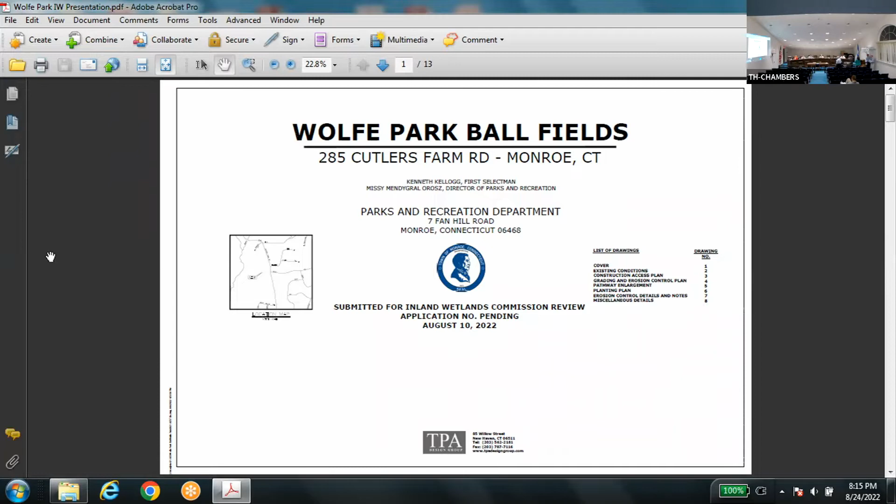We were asked to review and see what we could do to bring the project down in scope and complexity, and make it possible to get this carried out.

This graphic shows conceptually what we're looking at doing. The two fields: one is proposed to be built immediately east of the existing tennis courts in an open lawn area. The second, the west field, the larger of the two, is proposed to be built further west of the tennis courts across an existing wetland corridor. The project will also include construction of a walking path out to the west field to allow for pedestrian and emergency access.

The significant difference in this application is that we've reduced the size of both fields. The original scope back in 2017 was to maximize use, particularly of the west field, making as large an available playing area as possible for staff flexibility, and so the field location could be marked out differently year to year, enhancing the longevity of the playing surface. What we're looking at now is cutting back the size of the graded area in order to reduce the earthwork volume and bring the project down a bit in scope.

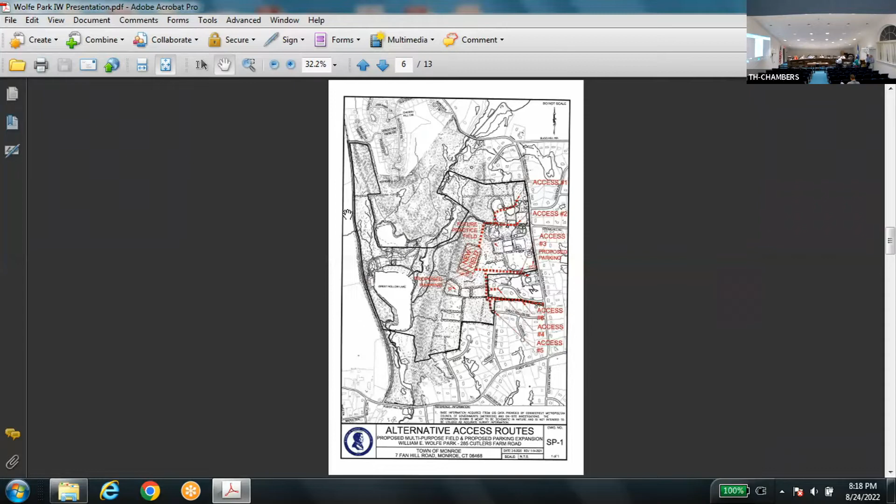But to get back to the other impacts, those are upland review area impacts, not direct wetland impacts.

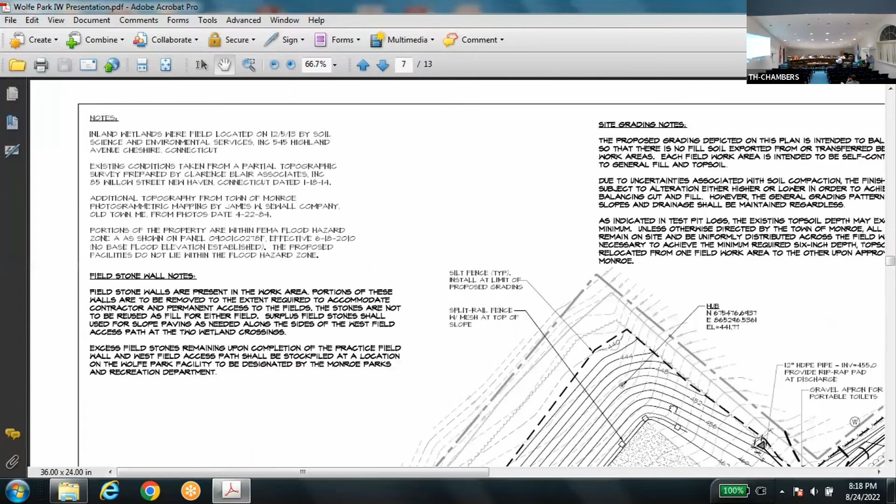What we're proposing to do now—looking at this, the practice field area is now the practice field. We are retaining the stone walls to the south, west, and north. The field previously had expanded much farther north and south, so it was necessary to remove those walls, involving grading and wall restoration. What we're trying to do is diminish the impact area and the potential cost by keeping the design as simple as possible.

We've also changed from a design which had a crowned ball field to a cross slope, so the field will slope from the tennis courts west toward the wetland.

Because we previously had a crown, we were anticipating needing drainage work between the field and the tennis court, since water would shed off the tennis court into a low area and also shed off the crown of the field to the same place. We had proposed an under drain at that time. At this point, we don't think that's necessary in terms of cost. However, we'd like to preserve the possibility that if a contractor working out there discovers a shallow groundwater issue, we may go ahead and install a French drain—a stone-filled trench—to allow water running off the tennis court to infiltrate more efficiently with less impact on the field.

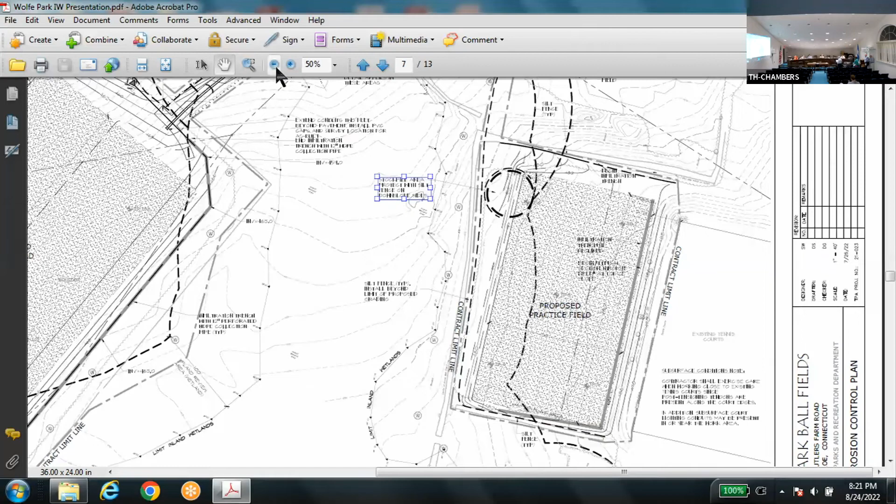That's essentially the crux of what we're proposing. The economy has been gained by simply taking out work - not having to relocate the stone walls, reducing the area that we're trying to create, so we're doing less earthwork. And we're also not making a paved path. It's going to be a gravel path. Instead, we're trying to see this through as efficiently as possible.

Overall, both fields have been designed to balance cut and fill. This is not intended to be an earthwork project in the sense that somebody's trucking in lots of material. In terms of what comes in, it's the material associated with building the pathway - the base material, the surface material, the pipes - and for the fields, crushed stone and pipe for the underdrains. The intent is there's a lot of good topsoil out there. It gets pulled aside, stockpiled, and reused once the fields are graded.

The fields are graded so that in both cases, you're cutting on the east side and filling on the west side. So we're taking what's right now a fairly steep sloping field and turning it into something that's at a playable cross slope in the order of 2%. So that's the crux of what we're here for - to get your consent that this remains consistent with the original approval and allow the parks and rec to move forward with the process.

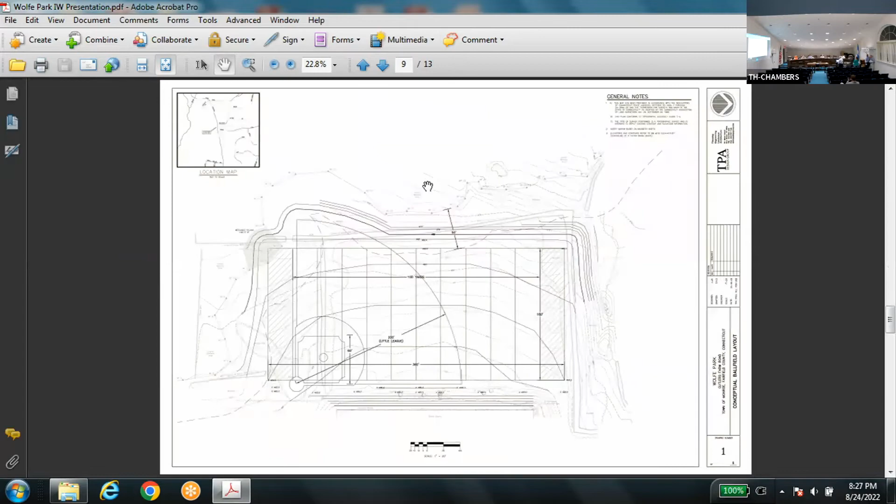Could I ask, can we go back to that first image that showed the pathway through the wetlands? Okay, so I've been a longtime resident and I know the area well, and I actually thought that going through that space would perhaps be more invasive, but in terms of the wetlands, it does not look like it is.

I'm curious about a lot of things, though, just as a parent of children in town. What is the relationship between those two fields? What is going to be happening? One is drawn to look like a soccer field and the other like a football field, but one is called a practice field and the other is west field. What is the intent of those two fields in relation to one another?

Ms. Orosz, the Parks and Recreation Director: So the intent of these two fields—all of you are aware we have a dual purpose area of baseball, softball, and soccer/lacrosse. So the goal to get these fields finally done is for soccer, lacrosse, football, field hockey, so that the baseball and softball fields can now be used accordingly. It's just a shift of some of the activities we're planning to do there.

Is that, so it wouldn't necessarily be that a youth sport would be on the practice field and then go over and play their game on the other? So one of the things we were talking about two years ago—I met with league presidents when I first really got into the reboot of this.

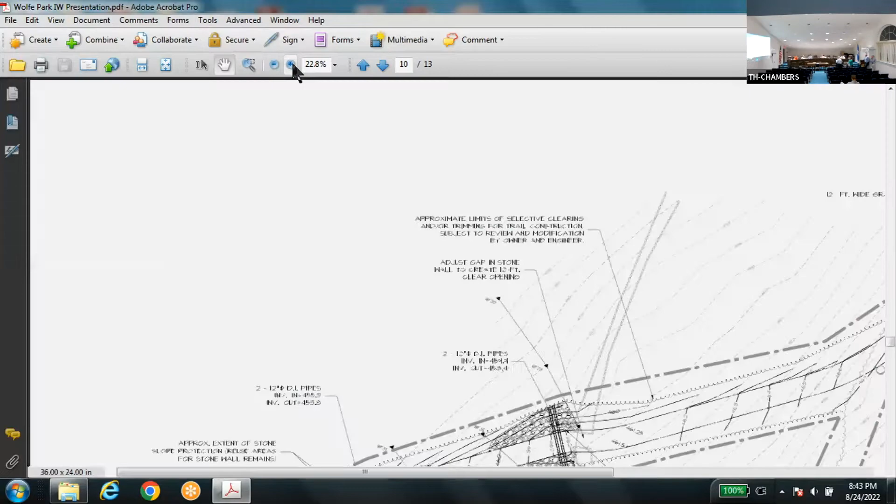How many square feet total impact? If you go to your plan, page 5, it actually shows it pretty clearly. Total direct wetland impact area is 2,971 feet. That shows those two crossing points pretty well.

Yes, and as you can see, we have the 2-to-1 grading — particularly the upper one is flattened out a little bit in order to accomplish a softer grade, especially on the downhill side, since the entire area does slope from south to north. So there's a little bit more impact area right here and right here than had been included in the original plan. Again, that reflects comments from the town engineer.

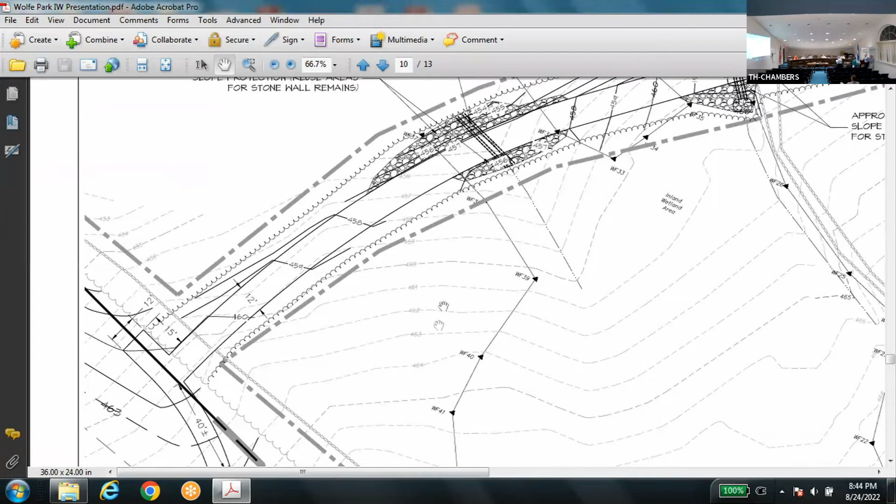For the most part, looking at other parts of the trail, we're trying to keep the grades as smooth as possible and as close as possible to existing grades, just softening them so it's a reasonable walking path — not too up and down. It still feels like a trail through the woods.

Twelve feet to me, and then you've got these wider areas up to 20 — you would just say 20. I mean, it just seems so invasive and so expensive. I'd really like to see a couple more ideas. I mean, I put 4 kids through school in this town, 3 of them played soccer, we spent a lot of time at these fields.

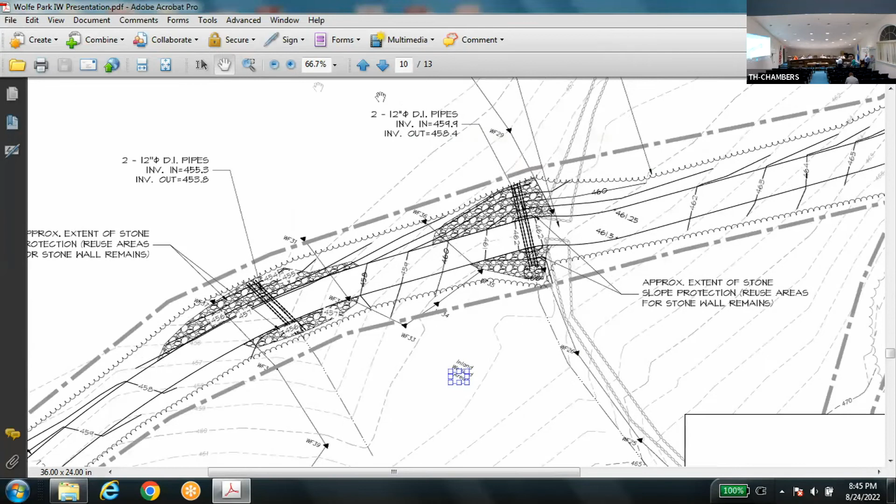Every time we wanted to go out to that hay field, we went through the lower area. There's already 2 openings — 3 or 4 stone wall natural openings that people already use. Well, this location was specifically selected because there is an opening in the existing stone wall. We were trying to take advantage of it to get through from the area where the reconstructed playscape is, through the existing path, and out to the west field.

That just seems like such overkill. And the area you're talking about is rocky, boulders, trees — it's a massive undertaking to put a path like this through here. I would really love to see another one or two ideas for where a path could possibly go.

Maybe further up out of the wetlands. I believe those wetlands extend, don't they? They're just not shown on here. Let me just back up. It looks like the end right there.

Where's the blue one? No, the wetlands weren't flagged farther down. It drops off very steeply there. And the water courses continue, they become more defined as water courses. But if we were to have someone go out and flag it, the wetlands would continue.

Yeah, and the wetlands are virtually continuous all the way along between the two field areas. There's really not a dry place that we can do this. We really identified specifically the two narrowest crossings to keep the impact as minimal as possible. We did look extensively at this shortest distance. In terms of the length of the crossing, it's almost twice as much, and there is literally standing water there much of the year.

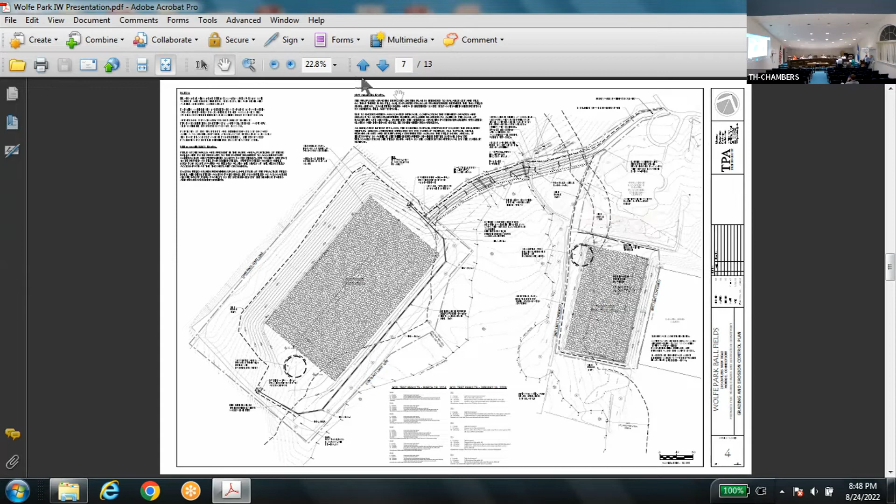So how much has to happen for the pathway as you have it designed? You call it access path 2, right? Is that what you're referring to? Oh no, that's the one that's to the practice field.

Either way, you're disturbing wetlands. The simplest way to go is the simplest path. In 12 feet, in some areas you're 24. I really like to see another plan.

Well, I might have been here back when this was approved. I don't know what I was thinking, but I don't like it. This is an amendment to an approved plan. So we're being asked to approve the amendment. Just the original plan and the original path were already approved.

Right. But before we go, Jim, you haven't really said much. And that's just the second pathway from where the primary path is, right behind the playground to the practice field. That's all that we're being asked to address tonight? I believe so, as Mr. Holsworth said.

One of the things that came back from the original bid was a lot of concern on the bidder's part about using the existing bituminous paths in the park and up toward the tennis court as a way to get in and out of that practice field construction area. That led to a lot of people padding their prices because they were afraid of how much work they were going to do to restore areas that were damaged.

So the intent is to find a different way to get construction access to the practice field. It is not being proposed to become a permanent path. The intent is once construction is done, things are going to rest, people will find their way around and figure it, and over time it will become obvious what people's preferred routes are to get to places.

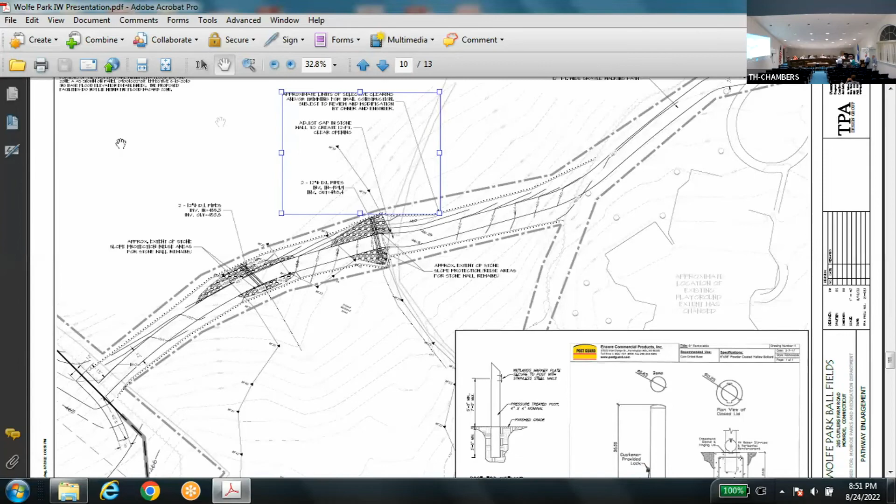No, the intent is that fields are going to have to grow in for a couple of years. It will take time for people to get a sense to figure out. There's a lot of different ways that you can get to those fields, obviously. Just back up... go back to that. Okay, that's fine.

Yeah, there's a lot of different ways to get to the practice field. You can walk up the paved path in the parking lot, cut between the handball wall and the tennis courts and get there. You can come in from the other angle. You can walk up from the playscape. The idea is that it's going to take time for people to start to use the fields, figure out where people are going to park for them, where they're going to come from.

If you're not going to convert that construction access into an actual path, then obviously people are going to take the most direct route. If you don't give them some direction, at least say, hey, go this way. What direction would they go in?

They could go in front of the playground. Oh, so that's walking around, there's probably a more logical route up the hill here. We're talking about just naturally developed footpaths. That's probably the way it would go. You can come in over here.

If you were going to go from the practice field to the west field, what's the actual path that's there? That's a fair question, if that's not a permanent path. But if I'm a parent, which direction do I go if I don't want to walk through the water? That's going to become a function of how these fields are scheduled and used.

The fields weren't intended that you go from one to the other, necessarily. That's something that is going to evolve as the Parks Department figures out what the demand is, who's going to use the small field, who's going to use the big field.

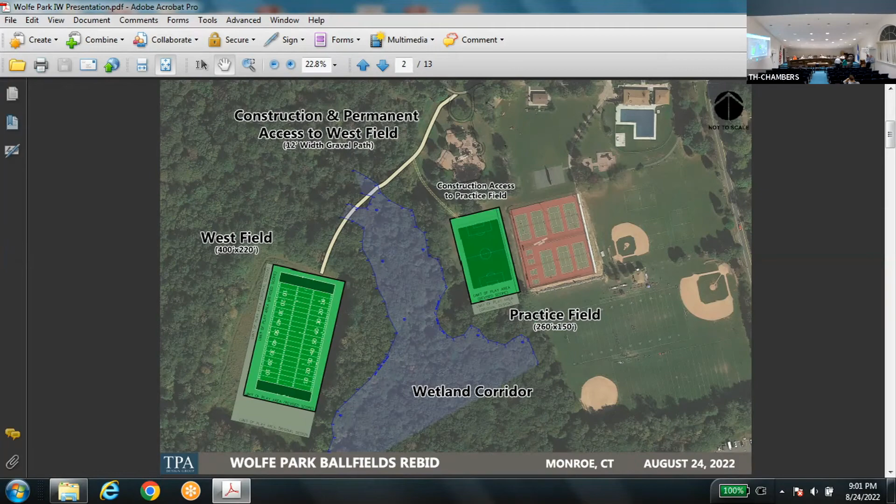Thank you, thank you for your time. Okay, now let's try and get moving. It's getting late, Chris has been patiently waiting there.

We have two hearing determinations to go through here. Is he back in now? Coming back in? Hey Rick, could somebody tell Keith he can come in again? Determination, 750. Yeah, our next one is going to be the...

Okay, all right, application hearing determination. We're going to determine what type of hearing to have. Given that it is 9 o'clock, we are not going to start a regular hearing with the intent to complete it tonight. So should we decide that one of these would be a regular hearing, it will still need to be scheduled for another date. IWC 2022-12, 754 Main Street. Proposed construction of outdoor storage in a regulated area.